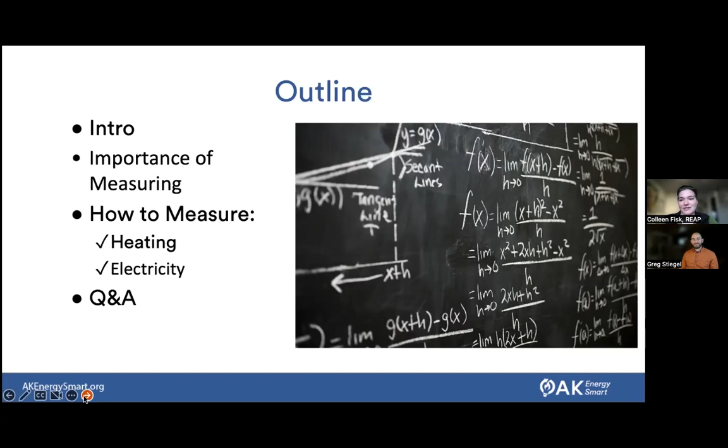So the reason why I think about this is if you can't measure it, you can't manage it. I can't say that I came up with this phrase myself, but I certainly like it as we think about our energy use. If you want to be able to manage and use less energy, you have to understand how much that you're using. And we want to use less energy through efficiency and conservation. So this is either your behavior change or improved technology that uses less energy.

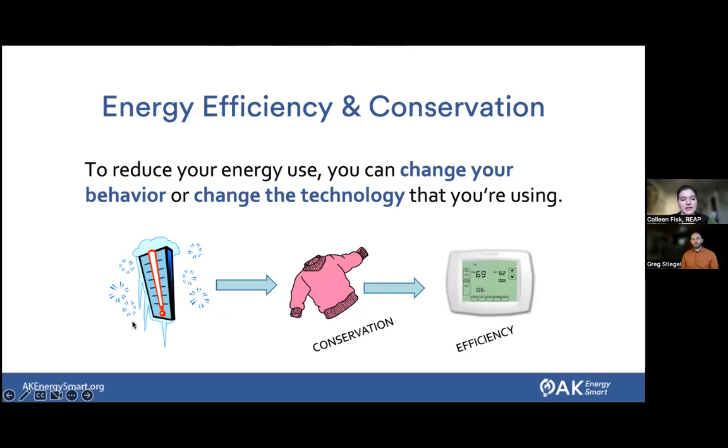If we have more efficiency and conservation, that's the cheapest and lowest carbon fuel that you're able to use. At REAP, even though our name is Renewable Energy Alaska Project, we very much talk about efficiency first all of the time. That's your free fuel. The only free fuel you're going to get really is your efficiency.

So we like to think about it this way, but also not just for the cost, but also for reduced carbon use of fossil fuels, a more comfortable home, better air quality. There's a lot of benefits to this. But again, all of that is not possible unless you understand how much energy you're using.

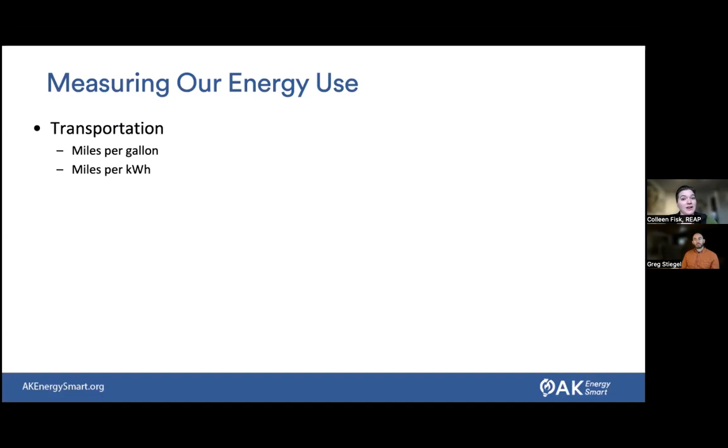So that's our why. This is why we're doing it. And there's this resource to get you started for how to do it. But we're going to be thinking about measuring our energy use. Now, if we think about our energy use for transportation, that's super easy. We think about miles per gallon, or for those of us with electric vehicles, miles per kilowatt hour. That's pretty straightforward, and I'm not going to spend a whole lot of time on that today. I'm going to be thinking about heating and electricity.

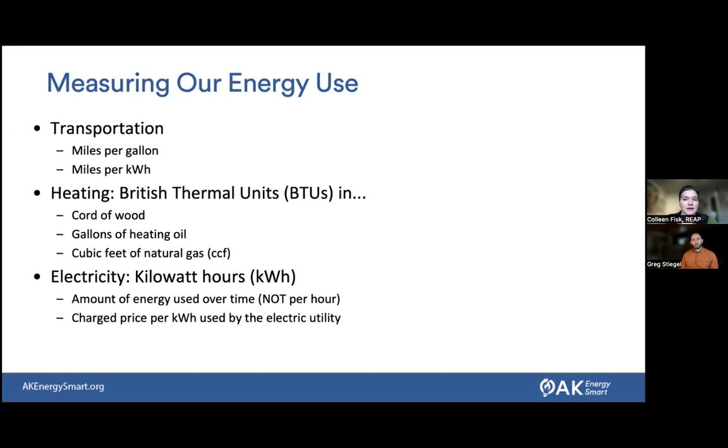So heating, at least in the United States, we compare our heating use in British thermal units. I'll talk a bit more about what that means in a bit. Think about cords of wood, gallons of heating oil, or cubic feet of natural gas, typically. And then for electricity, we're thinking about kilowatt hours. So this is our amount of energy used over time, and our electric utilities charge us per kilowatt hour. So we'll be thinking about how we can measure these different types of energy use.

Yeah, so Kat asked a question about having somebody trained on an air-based heat pump, and that's definitely a longer conversation about workforce development that I'm not sure I have a great answer to, but I'll keep that in mind, because I do have a slide here on heat pumps as we go through.

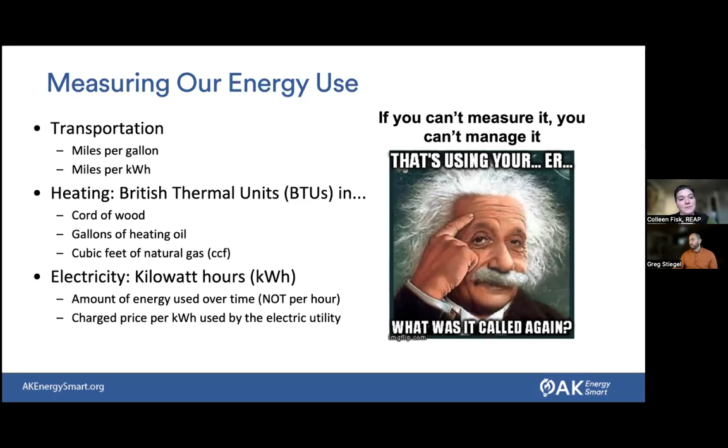So this is from the energy saving tips for Alaskans. Most of us, it looks like, are in South Central, although we have some folks in Southeast, which is fantastic. Love seeing that. Here in South Central, most of our energy costs are around space heating, 73%. For those of you in Southeast, it's a little bit lower, around 69%. But we also have other energy usage around water heating and appliances.

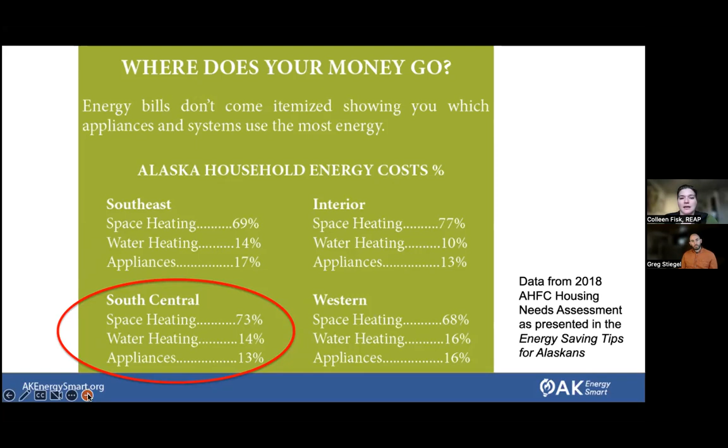So heating is the biggest area for energy savings, where we can save the most money, but it can be the hardest, the trickiest to actually implement and measure. British thermal units, if you're not familiar, is this weirdly specific British American unit that is about the amount of energy in one match. If you've heard of a BTU before, that's the general measurement. And so we can compare how much energy different fuel sources have for heating: cubic feet of natural gas, gallons of heating oil, or cords of wood.

And I also threw in on the bottom here, heat loss. I asked a mechanical engineer who designs heating systems for schools and hospitals, among other things. I said, okay, I'm doing this webinar on heating energy use. Do you still use British thermal units? He said, yep, we use BTUs. And he's generally looking at it in terms of heat loss, so how much heat loss a building has.

And this is just a funny side note. When I asked him about this, he said, yeah, we use MBH, which stands for mille BTUs per hour. So mille being a French term with a British unit used in the US. That's just how our heating systems go. So if you get confused, you're not alone. And hopefully you can use some comparisons and think about this in some new ways as I go through this.

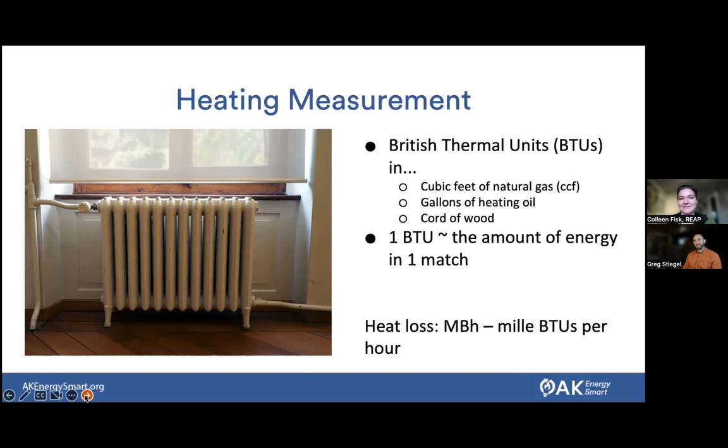So one of the biggest things for measuring your energy use is if you get a bill, use it, check it, look at it, see how much you're actually using. For those of us who get natural gas from ENSTAR, we can see how many CCF, or hundred cubic feet, we actually use each month. And so we can compare that over different months.

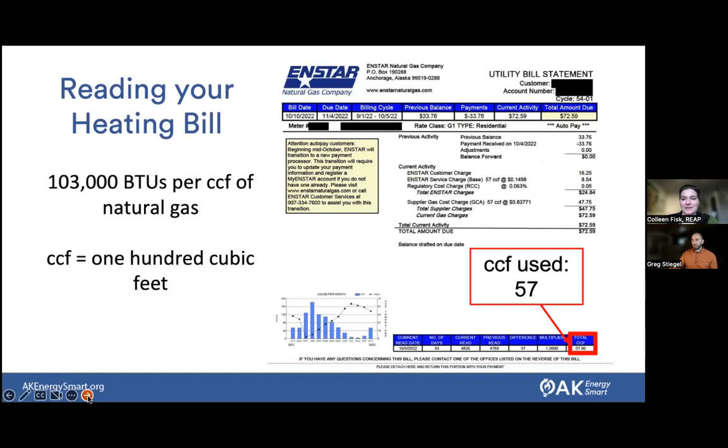So of course, not all of us are fortunate to have local, relatively inexpensive natural gas where we live. So a lot of places use wood for heating, or actually here where I live, we use wood as an extra heating source to offset some of our natural gas use because we have abundant dead spruce near where I live. So I'm able to use that.

And I'm wondering if you know what the recommended percentage of moisture is for wood. You know what that recommended amount is? It's a percentage of moisture. You can throw that in the chat. Okay, Jean says 19, George 25, 15. Yep, y'all are right in that range. They say less than 20% is what they recommend. And yeah, curing for at least a year.

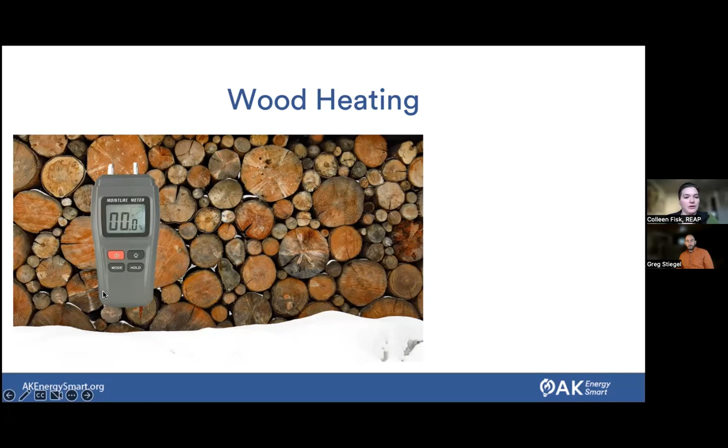That's great, Allison. And so depending on where you live and your normal air moisture content, you might say 6 months to a year. I was just in Cordova, and apparently the recommendation there is 3 years because of how humid it is. But if you want to get really specific, especially if you use wood as your primary heating source, you can get a moisture meter for 20 or 30 bucks, and stick this into different pieces of wood and see if it is around that 20% or less moisture.

I just pulled mine out. I checked a log that I was about to put on a fire. One log was at 6% and the other was at 10%. So I was feeling pretty good that it had cured enough. Of course, mine started as dead wood, so that was good. So you want that less than 20%.

And there is the BTU. So a cord of wood is a specific volume of wood. I forgot to put what that amount actually is in there. But that volume of wood, that's how you get wood delivered, is per cord. And so there are some estimates on the BTUs per cord. Thanks, Kendra. Yep, 4 by 4 by 8 feet. And so there are different BTUs per cord for different species, birch being the best, at least in Alaska, for what we have available, with white spruce, Sitka spruce on down.

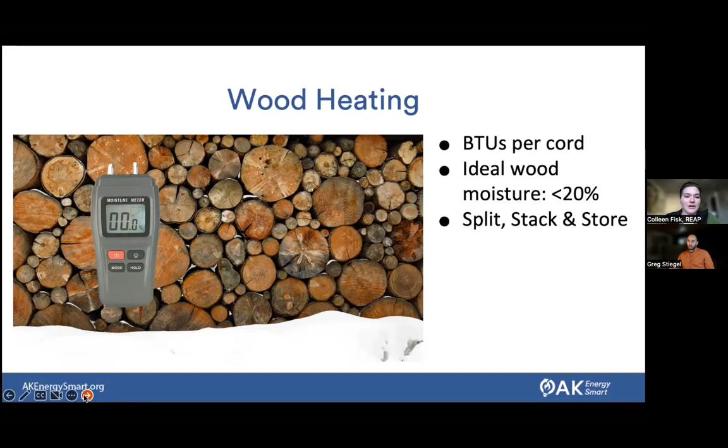And so what they say is that you split, stack, and store to minimize that wood moisture. And like Allison said, often here 6 months to a year for storing or longer. That is how you're going to get to that wood moisture content. And in terms of efficiency, you want to use an EPA certified wood stove to maximize that wood so that it's super efficient, and also not putting as much pollution into the air. And of course, there are more BTUs in really dry wood because you're not having to boil off the water as much before it burns, and in harder woods, like birch.

Any questions so far? Like I said, I tried to not make it calculus. I also want to mention, if I didn't earlier, that there are a lot of experts here on the call as well around energy. So if you have things that you want to add to it, please do as we go along. I am an educator, but not an engineer or an energy auditor, so I can certainly miss a few things here and there. Appreciate collaboration on it.

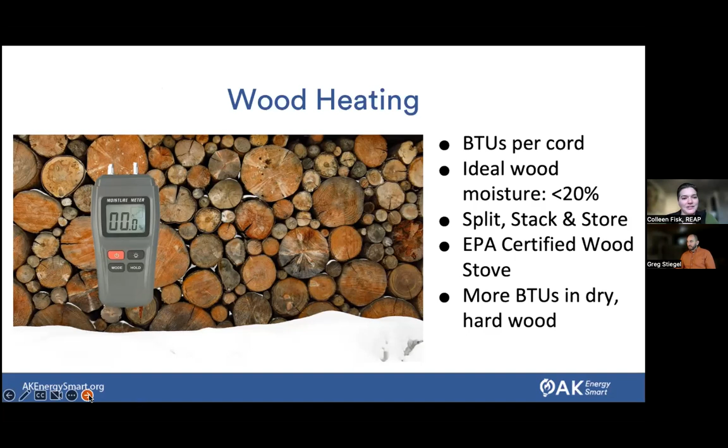And so heat pumps. This was mentioned earlier about heat pumps and being able to have somebody who can install it. George Rowe recommended getting in touch with Thermalize Juneau, which is also part of Alaska Heat Smart, where I got this photo from. So that is a great location to start if you're interested in heat pumps.

A heat pump is also known as a geo-exchange system. It transfers, not generates, heat from the air, ground, or water. Typically for housing systems, we see them from the air to air exchange, sometimes from the ground, and then water heat pumps or seawater heat pumps are normally on bigger systems, like the Seward Sea Life Center has one. And like I said, they transfer heat. So it's sort of like a reverse refrigerator.

If you think about the coils on the back of your refrigerator that get warm, and I call it the magic of thermodynamics, it is able to transfer and capture heat out of air, ground, or water that you may not think of as very warm, but by using compression and the laws of thermodynamics, there is some heat that you can actually capture and then transfer. And so you can get really high efficiencies by using heat pumps.

Heat pumps work really well spring through fall in most places in Alaska, and even through the winter in some of the warmer climates, such as down in Southeast Alaska, as you guys are very familiar with. And if you are looking into heat pumps, you'll see an output in million BTUs, so that MMBTU.

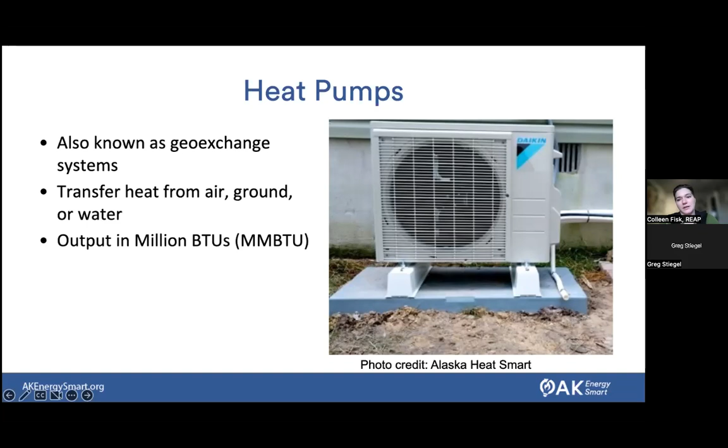Now, fuel oil is probably the second most common use of heating that you will see in Alaska after natural gas, at least in terms of number of households. And this one is in some ways easy to measure if you know how many gallons you get delivered. You can just do number of gallons delivered divided by the days between deliveries, and you can get an average gallons used per day. But of course, that doesn't necessarily tell you how much you use each day.

There are some gadgets out there, some sensors that can measure that. That starts getting a little bit more complicated. I believe that some folks in Fairbanks are doing a study on fuel oil heating at Alaska Center for Energy and Power, so they could help you out if you're interested in digging into that a little bit more. But in terms of our comparison of energy use, fuel oil is around 138,500 BTUs per gallon, typically.

And whether it's for fuel oil or any other type of heating, you can save 2% on your bill for every degree that you turn down the heat. I've also seen as high as 3%, but around 2% is what I see more commonly. So that's a good way to be thinking about it, no matter what your heat source is.

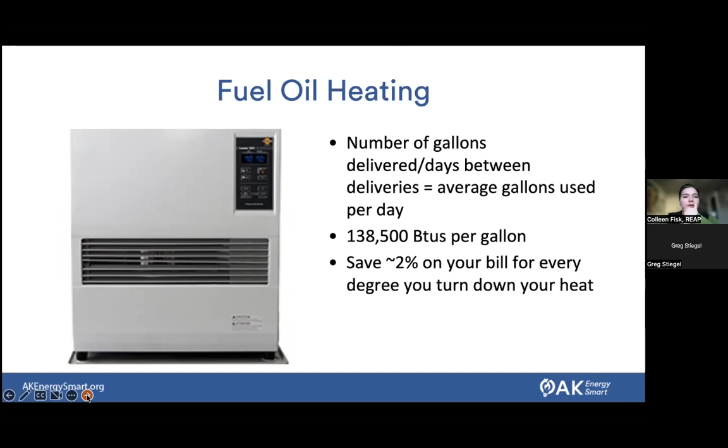And so if we want to calculate the costs of using different energy, unless you're getting your bill from ENSTAR, which I gave an example of before that shows you that really easy cost per month, there are two calculators out there. One for heat pumps, which Greg put on there, which is a fairly recent one, so you can see roughly whether installing a heat pump would be financially feasible for you. And then there's also one for wood heating.

The wood heating calculator is a little bit on the older side, and it only includes Alaska Peninsula, Bristol Bay, Copper River Valley, Southeast and Southwest. I think maybe because South Central has natural gas, I'm guessing. I'm not sure exactly why they didn't include them, but that can give you an idea of wood heating cost. And those are both free and available to use online so that you can, again, think about that measurement of your energy use in that way.

What fuel sources, I should have asked this earlier, what fuel sources do you all use for your heating? Or at least for the primary heating source. For me, it's natural gas. Okay, heat pump. Great, oil, yep. Wood, birch spruce mix. Diesel, so that's the same as fuel oil. Yep. Okay, great. There we go. So hopefully I've hit something for each of you in terms of thinking about your heating use.

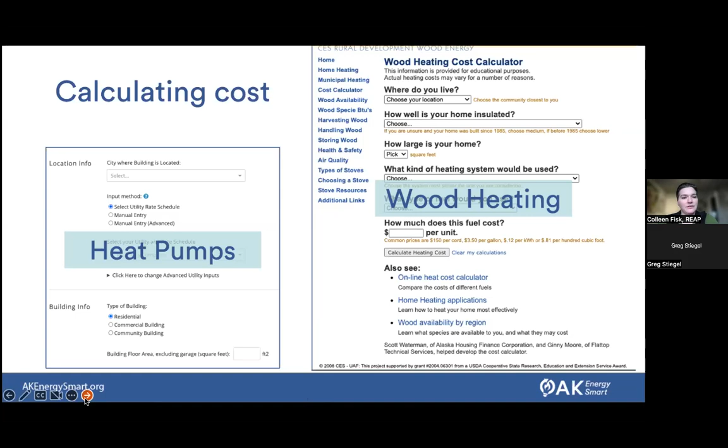And this contractor, energy auditor, opened up that attic and they could see that the insulation had been compressed and had some things on top of it, so it wasn't working as efficiently as possible. They were able to make some quick fixes so that it wasn't compressed any longer, add some insulation, and put these boxes and stuff on top of boards so that it was not compressing that insulation. And so that's one way you can measure.

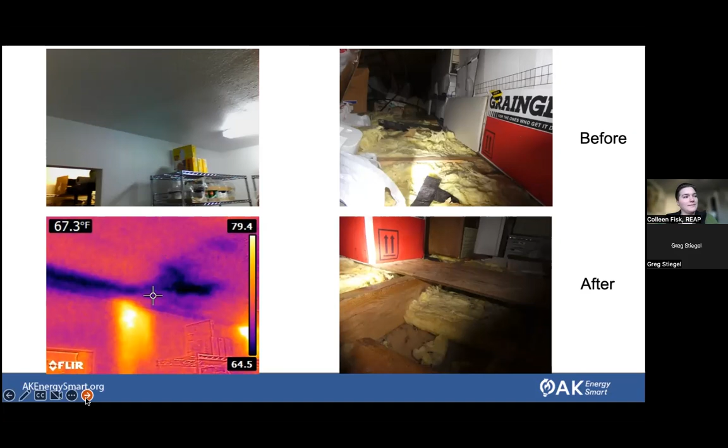Another way you can think about measuring energy use is through an infrared camera. Of course, that's not something that's cheap to have, but we do recommend, especially if you have a home that's not quite as energy efficient, doing an energy audit so you can identify these sorts of areas where there are major energy losses. People who do energy audits have these infrared cameras that they typically can use to check for that.

You can also measure some of your major appliances indirectly. So you can measure the temperature of your hot water. To do this, you run the water on hot for 2 minutes, to make sure that it gets the hottest water coming straight from your tank to whatever faucet you're running. And then you can use a digital thermometer to measure that temperature.

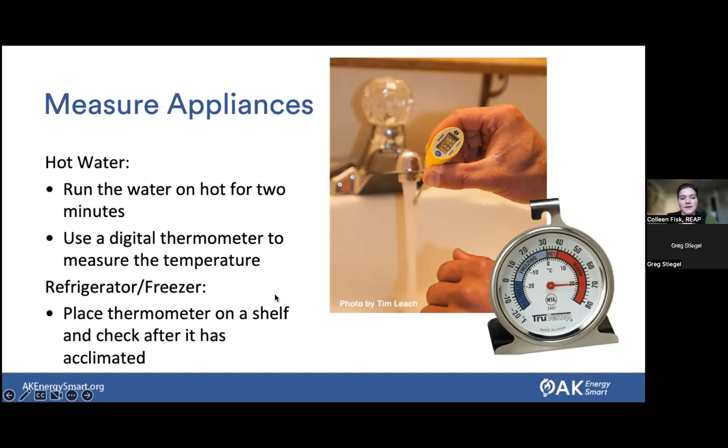And you can do a similar thing with a refrigerator or freezer. They have these pretty inexpensive fridge freezer thermometers that you can get at Home Depot or Lowe's, I think for $5. You can put that on a shelf and check it after it's acclimated, so you know whether you're within the ideal range, because if it's lower than it needs to be, you can turn it up a little bit. Same thing for the hot water heater. If it's much more than 120 degrees Fahrenheit, you can turn that temperature down.

And if it's all the way at 140, which is sometimes the standard temperature it's set at when it's installed, if you turn it down to 120, you can save 6 to 10% on an energy bill. It's really important to not turn it down lower than 120 degrees for safety reasons. And of course, each situation might be a little bit different. If you have elders or immunocompromised folks living in your home, you might have to err on the side of a little bit warmer. But you can check it using a digital thermometer to see if the temperature is actually what the setting says it's at.

So Kendra, how realistic is it to install a heat pump? Depends on where you live. I believe you're in South Central here. Finding an installer can be tricky, but it is certainly realistic. We built a barn this summer and I'm getting a heat pump to put in the barn to heat part of that space. It depends on what your electricity source is as well, because it does take a lot of electricity, around a hair dryer, a little bit more, to run a heat pump, from my understanding. Not having yet installed the heat pump, I can't say for sure, but that's my understanding.

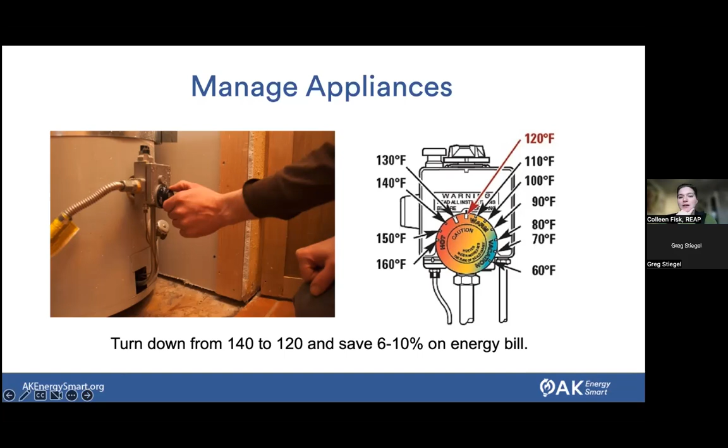Henry, I'm not sure if you're asking Kendra, but if she's off grid, that means she's not paying for electricity to a utility, I think. But I'll get to electricity. Conveniently enough, electricity is my next slide. So any questions so far on heating or water heating that I've touched on here? Measuring energy use. Okay. I don't think I've seen anything come in through Q&A yet either.

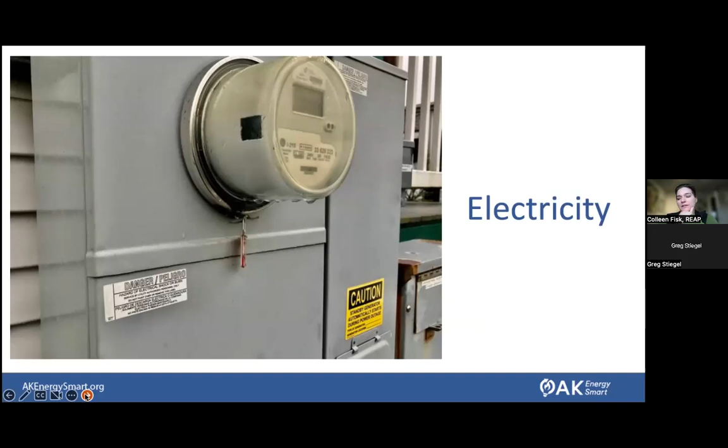MEA, AEL&P, Chugach Electric, I think those are some of the utilities where you're from, they all have them available to borrow. And of course, you can also Google it. You can see what the good old Google machine tells you for how much electricity different appliances use.

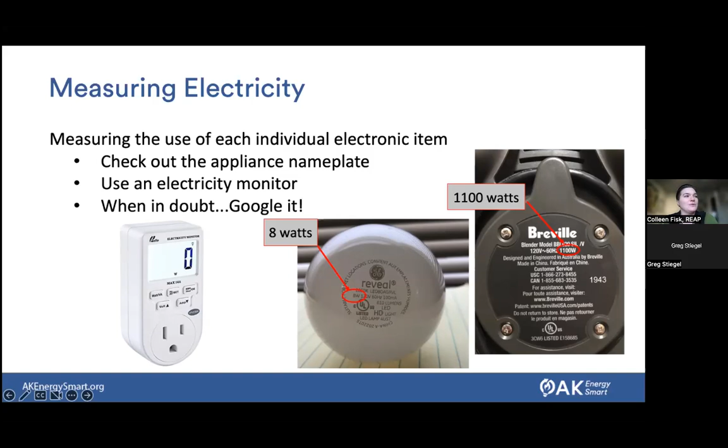So once you have that, then you can figure out your kilowatt hours, which is what the utilities charge you, right? They charge us per kilowatt hour, and a kilowatt hour is another tricky unit, kind of like BTUs. Kilo is 1,000, and watts, that's our base unit that tells you how fast it's using electricity. And if you know the total number of hours over a given time, usually a month or a year, that will tell us our kilowatt hours, or kWh.

One way to think about this is if you have the 1100-watt blender, say it's rounded down to 1,000 watts, that's 1 kilowatt. If I ran it for a whole hour, that would be 1 kilowatt hour. For 2 hours, that would be 2 kilowatt hours. And so that adds up over time. And that's what the utility says over a month: this is how many kilowatt hours we measured that you use.

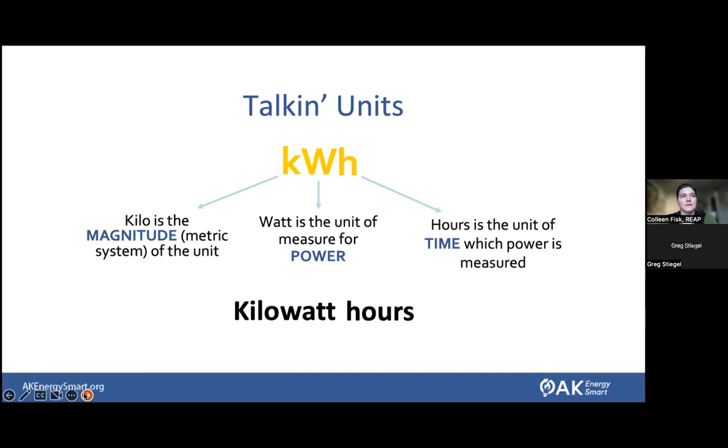So Juneau's so low relatively because they are almost 100% on hydro, and the hydro systems that they have are paid off. They're older systems and they're not currently being paid for, so that cost has been recouped. And they don't have much fuel costs, being able to use that hydro and have lower costs for their electricity.

And so this is where you start thinking about the crossover of electricity and heating, such as, thanks Clay, yep, population concentration too. It's not spread out over a really large area, like Matanuska Electric, serving a very huge geographical area for their electricity, with really long power lines that they have to maintain and service. Yep, thanks Clay, good point.

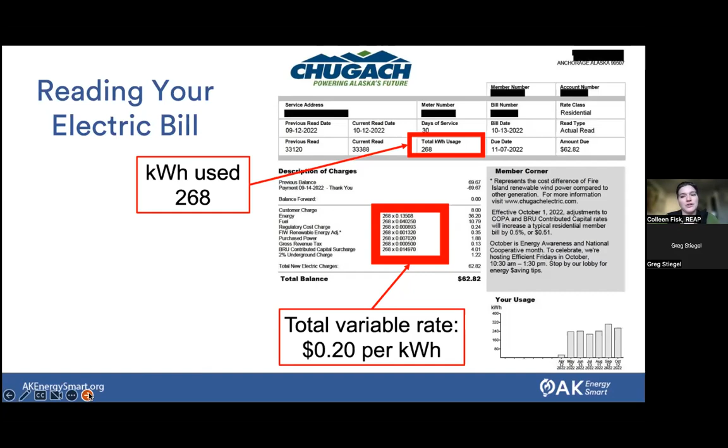And it's a really nice way to be able to see where something is like, why did my power spike suddenly at 1 a.m. or something? Or, oh yeah, I went on vacation, I left on this day. And so can see if my electric use didn't go down as much, maybe there's something weird going on. So that's another way to look at that, measuring your electricity use.

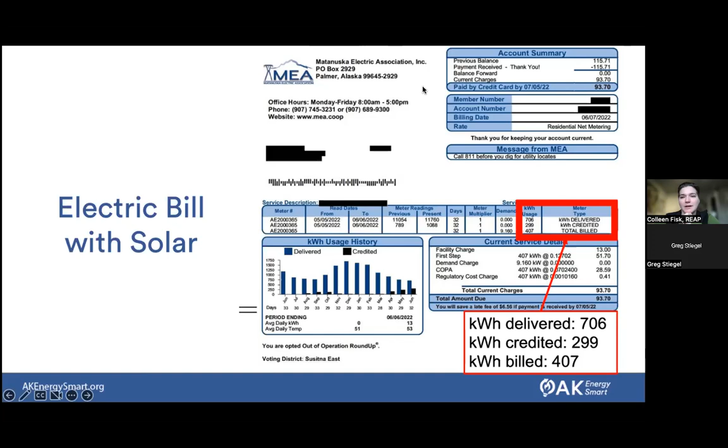Okay, so I'm going to show a quick example here of how you can calculate the costs. And I use the fun example of the Arctic Star, which if you've been in Anchorage in the wintertime, you've probably noticed on the east, up on Arctic Valley. This is a star that Fort Rich, the base, maintains and puts up. They turn it on the day after Thanksgiving, and they leave it on, twilight through the night until it's light again.

So about 16 hours a day, every day until the last musher on the Iditarod makes it to Nome. And so we've estimated, if the base paid residential electricity rates, which they probably don't, but that's what we're going by to compare here, how much money would it cost to power it? They use 370 10-watt LED lights that are on for 16 hours a day. And we've already seen that Chugach Electric charges 20 cents per kilowatt hour. Again, this is if they paid residential rates.

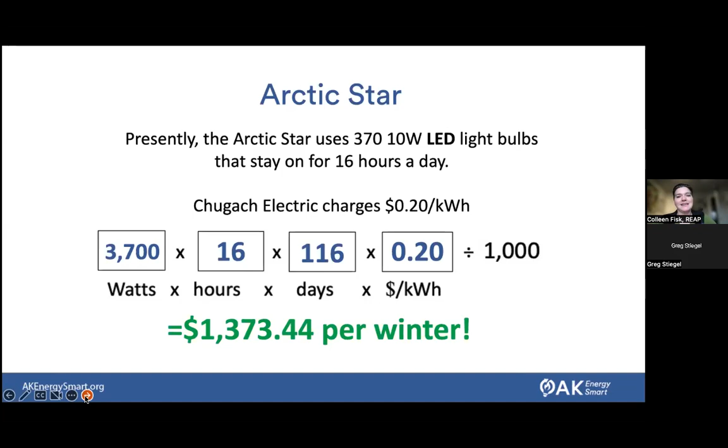However, this is when they're using LED lights. Up until 2020, they were actually using incandescent light bulbs. So if we did that same math, but with 75 watts per bulb, that cost was actually $10,300 per winter at that 20 cents per kilowatt hour. So being able to measure your energy use and calculate that cost matters.

Now I'm going to assume that most of you don't have 300 or 350 bulbs on 16 hours a day through the winter. But it does help you understand that scale, and understanding that cost and being able to do those calculations and measurements can really help you understand how much, or if, something will save you a lot of money. So we have this brand new electricity use calculator.

This is the first time it is being shared publicly. We've been playing with it and putting it together, and we now have this electric use calculator where you can put in your utility rate and different items, and it will automatically calculate the cost for you for the day, month, or year. And you can add a bunch of items to a list. So if you want to see how much everything in your living room costs you, or compare two different types of appliances and their costs, you can do this on this electricity use calculator.

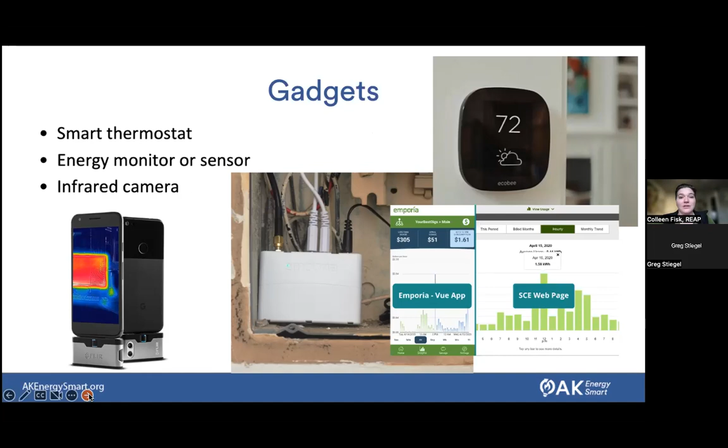I do want to say, though, that we can use some really simple tools to measure and therefore manage our energy use. So look at your energy bill each month or whenever fuel is delivered, however it is that you're getting your energy, and take advantage of those free tools like the online portal and usage data. Start becoming aware of your habits and usage.

And then you can use some tools if you want to measure things really specifically, like an electricity monitor, or a fridge or freezer digital thermometer. And once you're able to measure and identify those things that are using a lot of energy, you can start reducing and saving on that energy. So while there are cool gadgets, you don't have to have those really fancy gadgets to be able to manage that.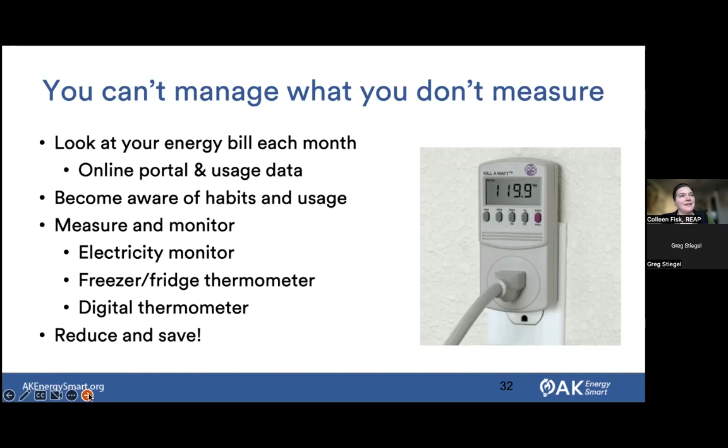So hopefully this kind of gets that question about, well, what's the answer to not having an installer for a heat pump? Well, let's do some more education, which doesn't really help. Let's do workforce development. It's a lot of education of people who would be able to do it, but don't know a demand, and also people who just don't understand what's out there. So not a great or quick answer, but something that I do encourage.